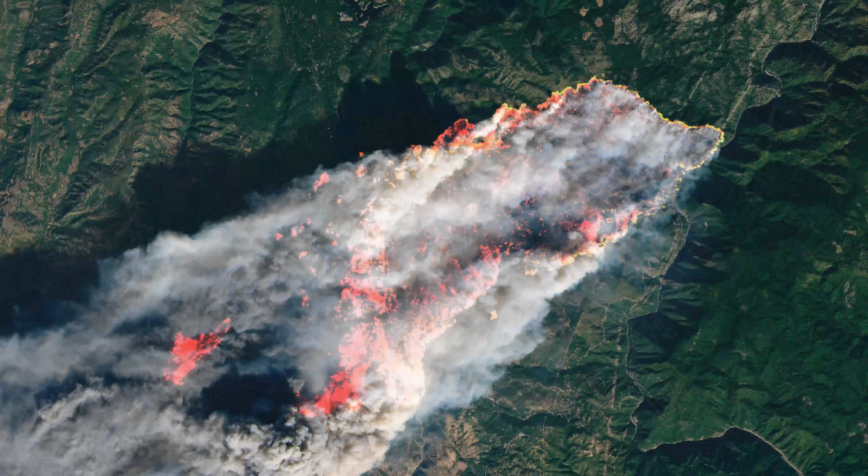As the meeting point between natural and built landscapes, the wildland-urban interface constitutes areas at highest risk for destructive and deadly fires, especially under the impacts of global climate change.

Wildfire events in the past decade have proven that further encroachment of development into dry and drought-ridden wildlands results in continuously unprecedented fire disasters. In order to mitigate this risk, we must rethink how these two entities meet, and limit the abrupt delineation between the arbitrary jurisdiction of natural land and urban land.

Rather than allowing these territories to meet along a single edge, this proposal reconfigures the built environment in the areas surrounding Paradise, California to create a series of edited edge conditions. The master plan strategy inserts two intermediary zones between wild and urban, designated as wild adjusted and urban adjusted.

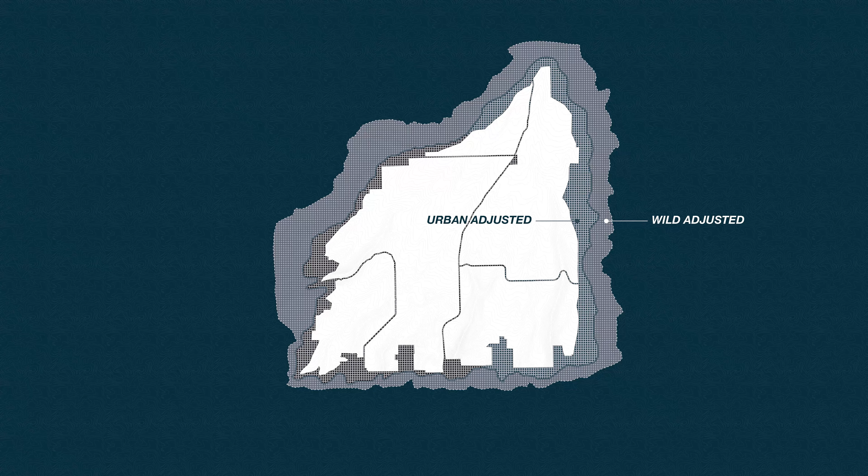The town plan, reconfigured around shared resources, public lands and year-round activated hubs, aims to foster community as a key ingredient to resilience. As a partial physical barrier, the thresholds will help to slow the spread of fire. But just as importantly, the master plan offers sites to engage the community during times of tranquility and non-emergency, so that recovery after disaster is less daunting.

The chosen project node on the eastern periphery of Paradise exemplifies this activity-driven approach, utilizing structures that highlight both UA and WA strategies respectively. The site of our main project is a section of the urban adjusted and wild adjusted zones on the eastern bluff of Paradise, looking out onto the Feather River Valley. Two structures occupy the site.

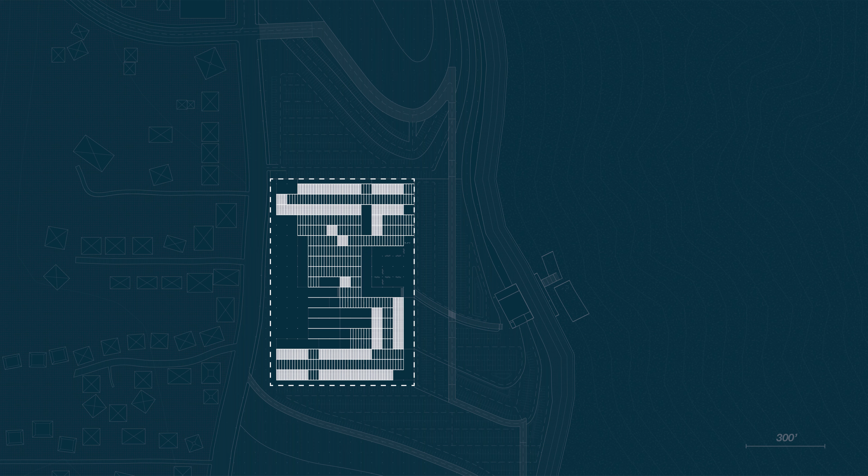The urban adjusted portion contains the farmers market, which transforms into a temporary emergency shelter for displaced members of the community in the aftermath of a disaster. The second structure is the wildfire management hub and community outlook, which spans the fire access road and tunnels into the wild adjusted area.

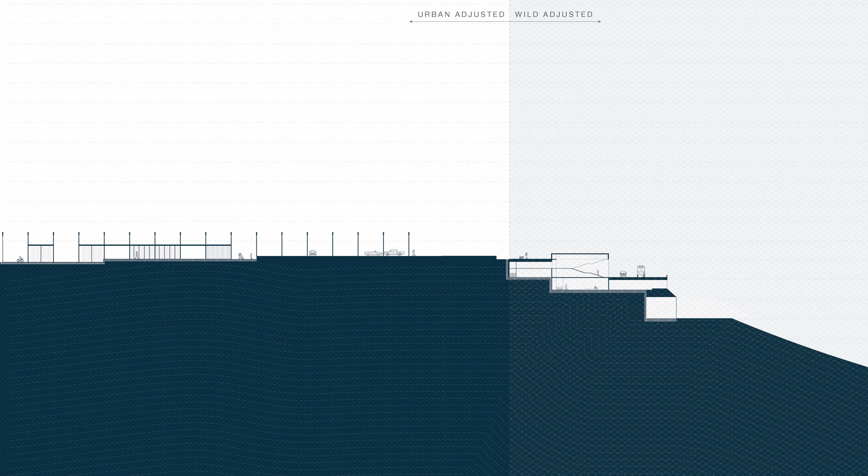The farmers market takes on a mat condition, sited lightly on the land and transitioning level by level with the slight slope on the top of the hill. Conversely, the wildfire management hub digs into the steep side of the hill, exposing dramatic views throughout the valley and beyond into the surrounding wildlands.

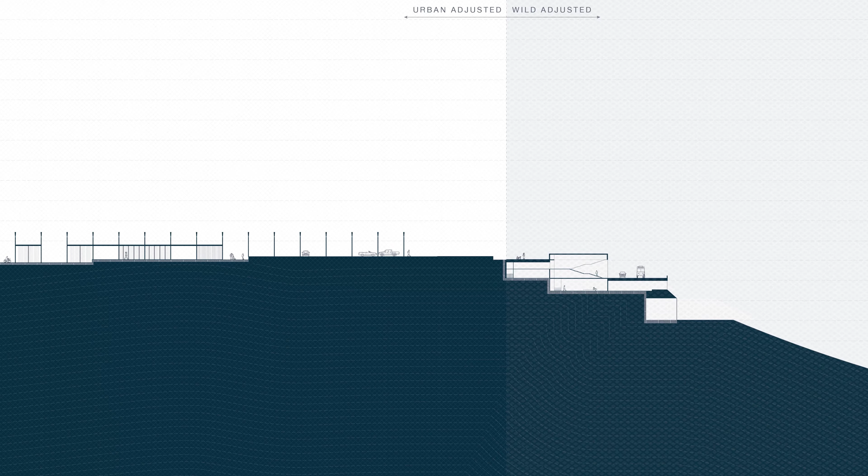Though the two structures operate independently and convey juxtaposing attitudes toward the landscape, the ecology of the site as a whole operates as a single system to facilitate both long-term and short-term resiliency.

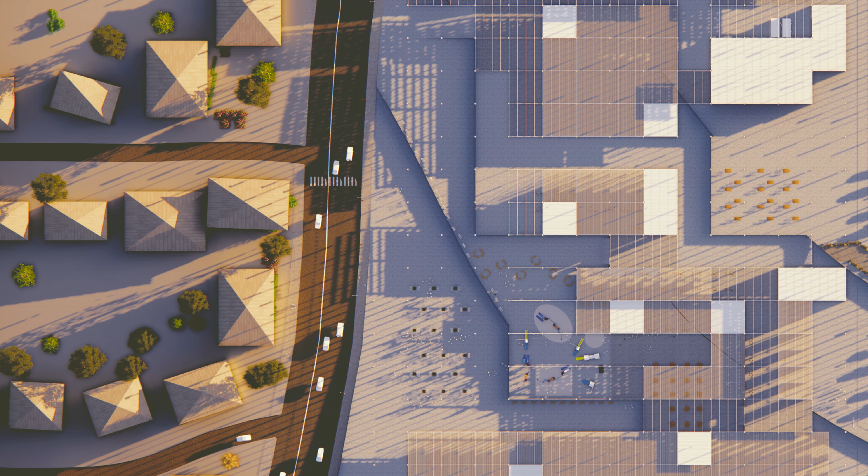Community members move throughout both sites, interacting with each other, while also collectively engaging with the surrounding landscape in different ways. As a result, the site allows visitors to understand use and development of the land within a framework of the greater ecology of the area as a whole, indelibly connected with the surrounding nature.

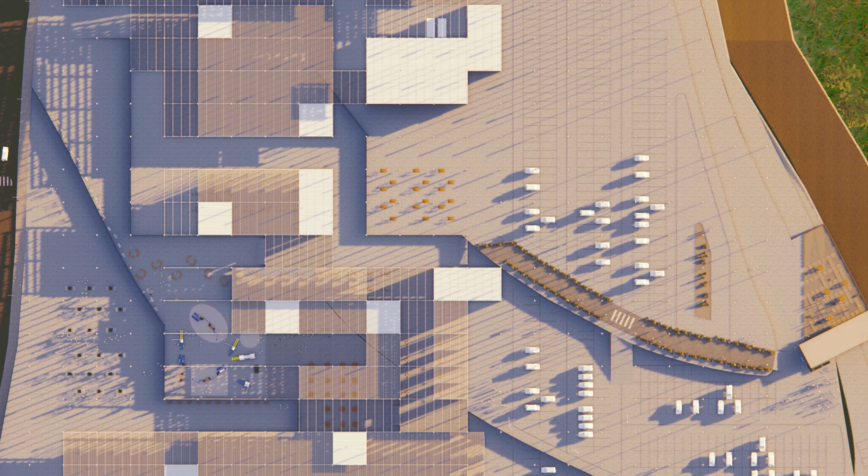Therefore, fire, a naturally existing component of the land, can be recognized as an ingrained aspect of daily life. The farmers market and management hub each contribute to this goal of the project through different means.

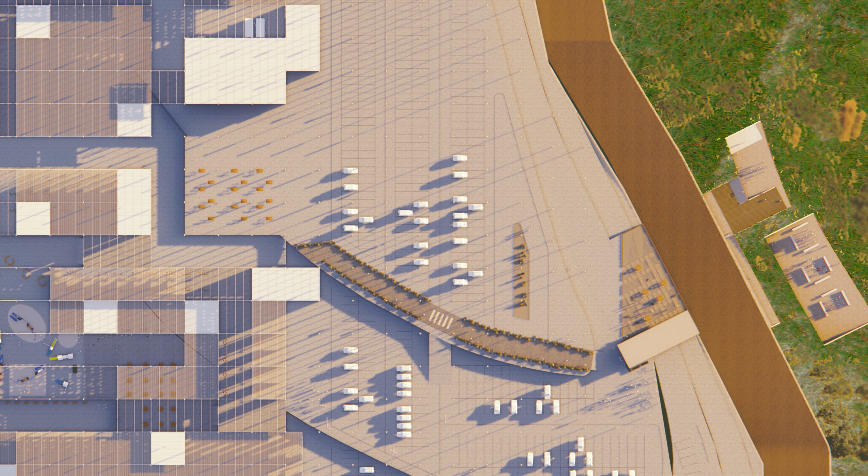The planar organization of the farmers market mediates between the strict 40-foot by 40-foot column grid of the windfield and the slight slope of the landscape. Each floor plate of the structure descends in 5-foot increments, allowing for a high level of visibility across the market.

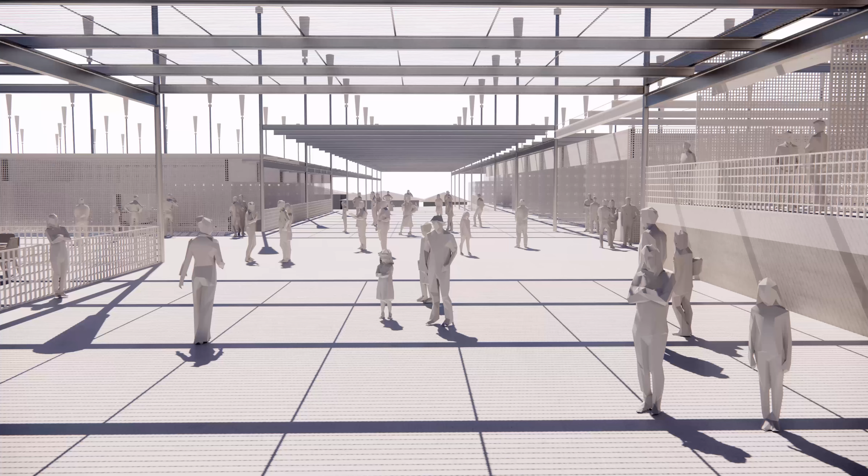The programmed spaces of the site include an information center, administrative office, sit-down restaurant, security office, eating and seating areas, children's area equipped with solar energy absorbing play structures, and market stalls.

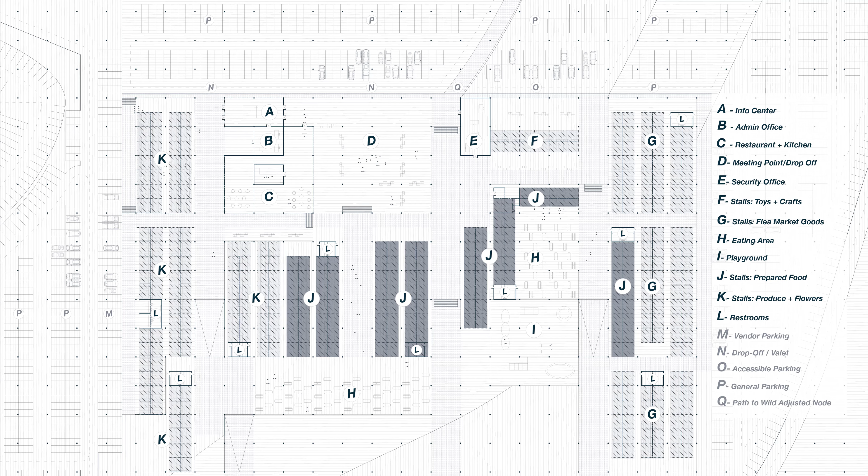The stalls are categorized as produce stalls, prepared food stalls, and flea market stalls. Each of these stall types has slight differences in layout, but all conform to the 20-foot by 20-foot footprint dictated by the subdivision of the column grid.

As a transitory site, the market operates through continuous movement. Vendors, customers, goods, architectural components and wind flow all constantly circulate through the space. The orientation of the project emphasizes this aspect, as main walkways cut through the market, maximizing east-west directionality.

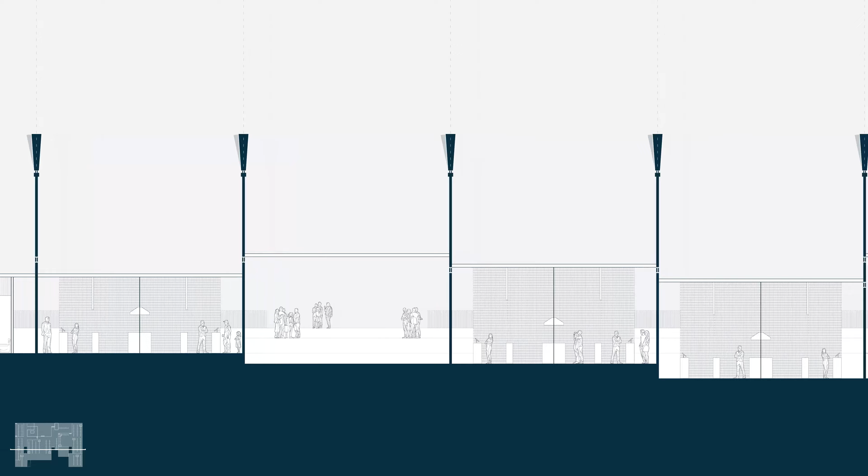The turbines operate via oscillation of a carbon fiber shell. The resulting kinetic energy is absorbed and converted without transmitting to the structure or column below.

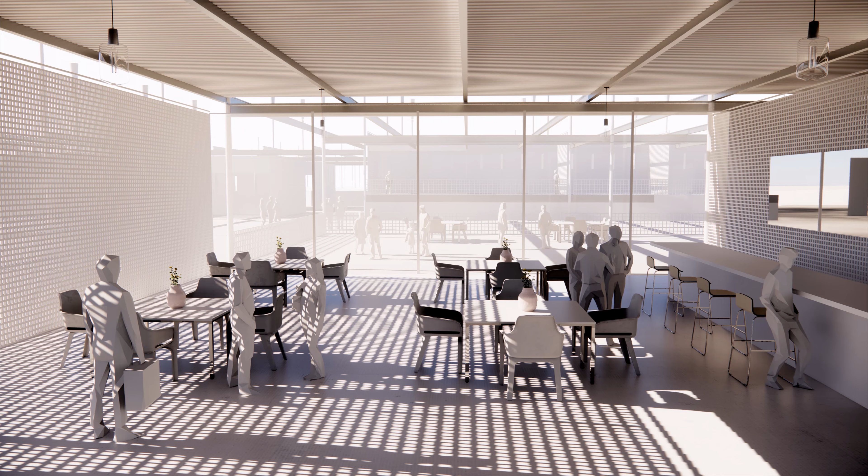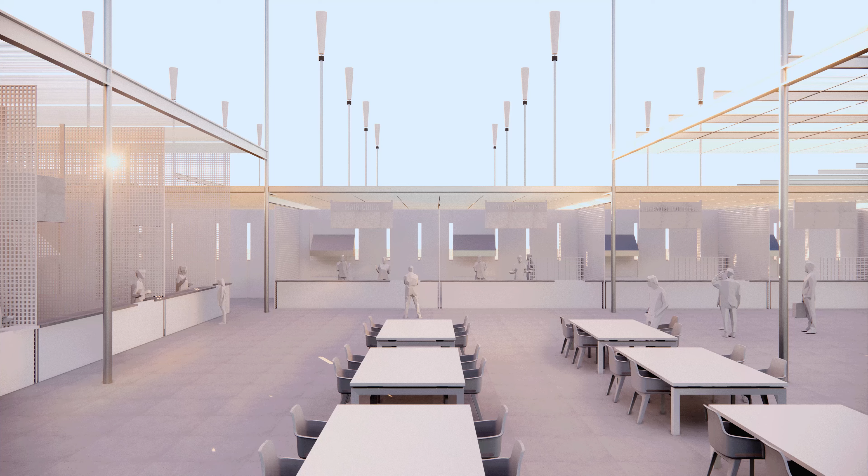The community of Paradise uses the space as a recurrent site of socializing, exchange, and play. This initiates the market as an important hub in the civic life of the town. With this relationship established, the market is primed to serve as a site of community resilience in the event of a disaster. Supplies distribution, communal services, and temporary shelter take over the spaces in the aftermath of a major emergency event, wildfire or otherwise. And the flexibility of the architectural system facilitates this transition.

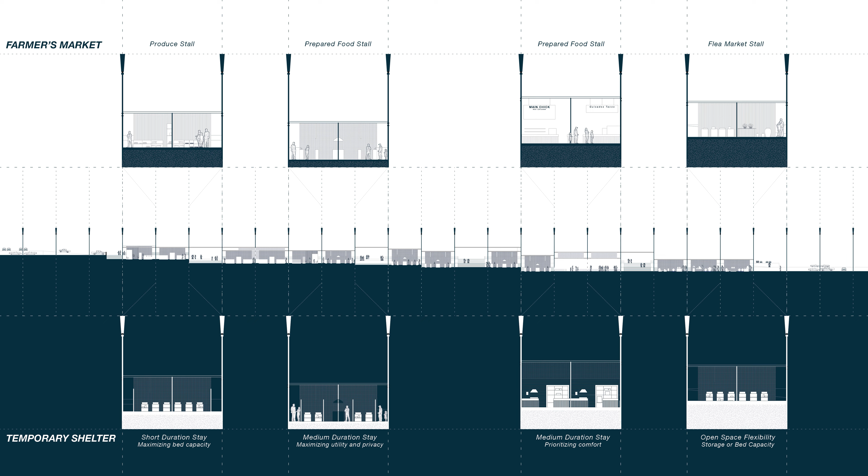The different stall types align with different needs of accommodation for varying lengths of time, depending on the magnitude of the event. The open, highly flexible produce and flea market stalls can be maximized with beds and storage for short duration stays, while the layout of the prepared food stalls are equipped with semi-private sleeping quarters and micro-kitchens for longer stays.

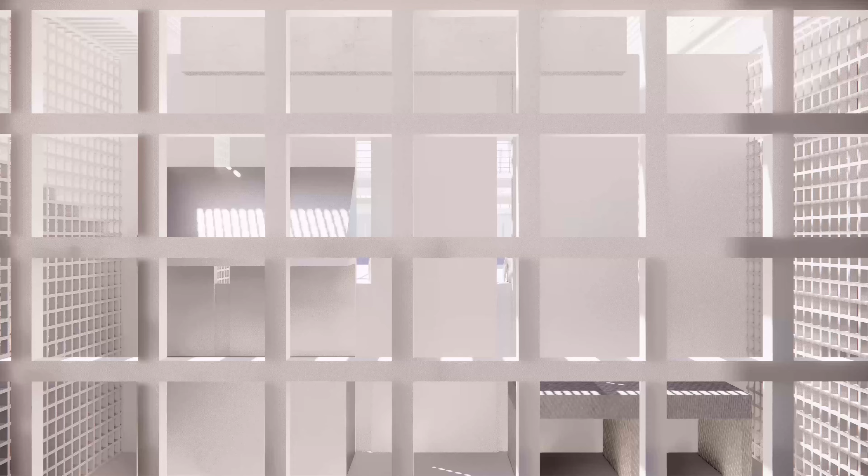The intention of the farmers' market is to demonstrate flexibility, not as a trope often associated with resilience, but as a community-specific strategy in both program and design. The site combines aspects of adaptability in both urban-scale design and small-scale architectural detailing. In this way, the project facilitates a broader understanding of how human activity and natural ecologies can support and benefit each other.

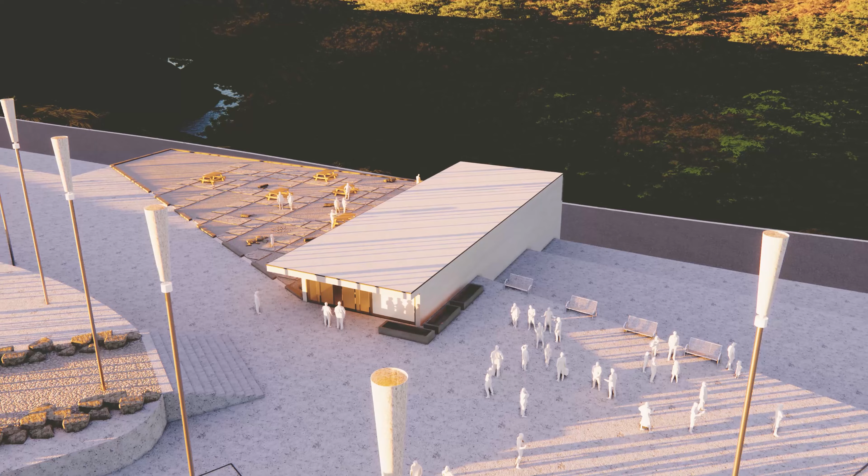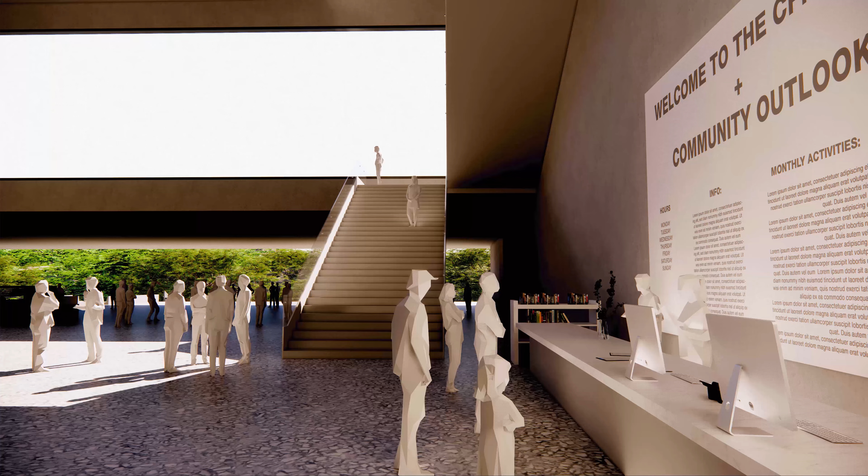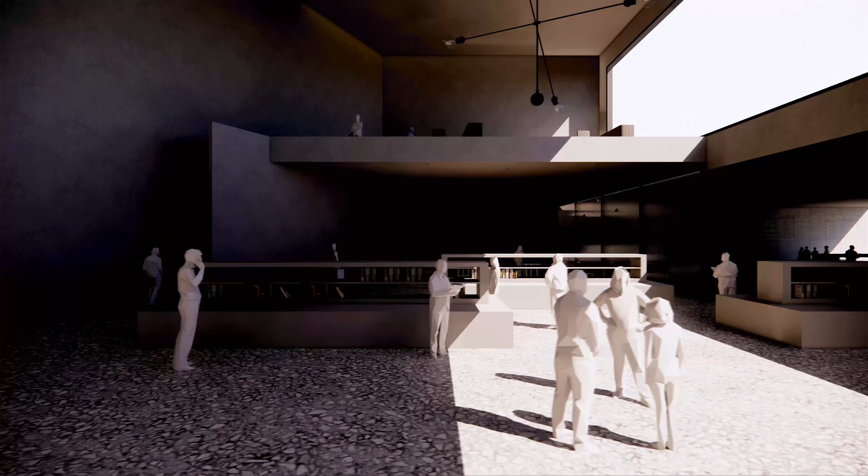Moving further out from the farmers' market following a pedestrian path across the site, visitors to the Wildfire Management Hub and Community Outlook are greeted with a minimal entry marking the edge of the wild adjusted zone. From the top level, visitors can descend into the building or choose to remain on the rooftop terrace to enjoy views of the valley. The first interior level opens into the lobby space and information center, with adjoining open offices for fire management officials. The lofted level, opposite the main staircase, meets the surface of the fire access road, allowing for easily available storage of firefighting equipment and vehicles.

The sunken reading area aims to facilitate casual exchange between community members and officers of the CFMC, PBA, Paradise Fire Department and CAL FIRE, offering freely available information on fire safety, permitting for prescribed burning, and volunteer opportunities.

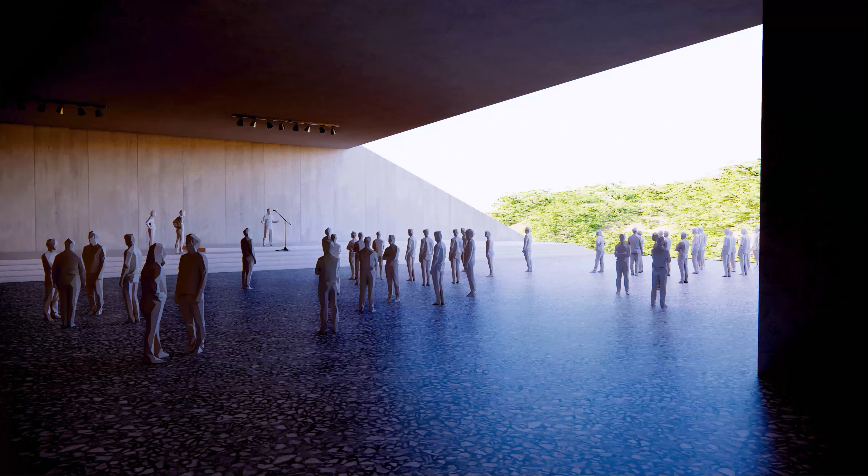Descending further into the wild adjusted zone, the building opens out onto the topography of the hillside, confronting visitors with a physical experience of traversing the landscape. At this level, open community gathering space offers flexibility in program and function, from large-scale information sessions to small group trainings. The orientation of the building allows for unobstructed views of the surrounding wildlands, and sets the stage for community members to witness changes in the landscape over time.

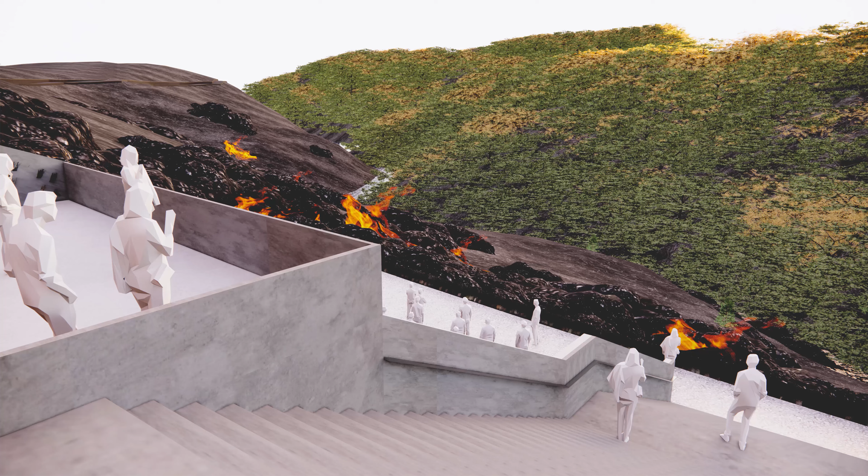The structure itself acts as a threshold, functioning as a main hub for a larger network of fire management officials and administrators by providing access into the wildlands. The hub also offers the broader community of Paradise a space to appreciate and learn from their natural surroundings, allowing them to reflect on their own existence and daily activities within the greater context of the larger ecosystem.

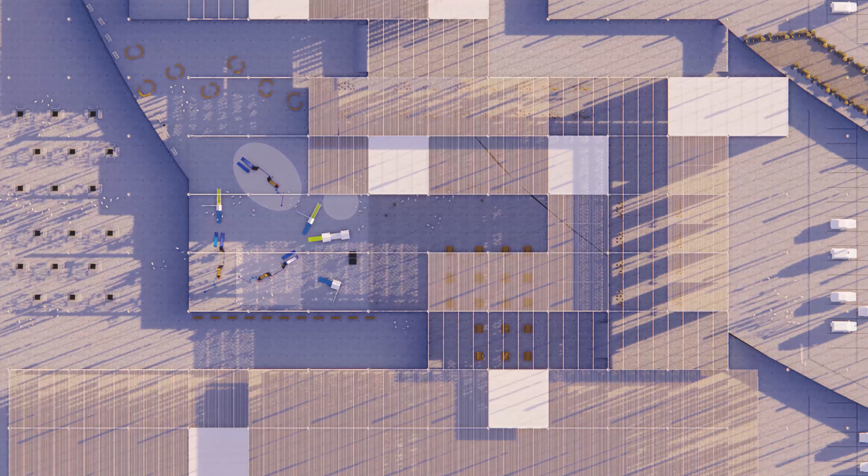Both the farmers' market and wildfire management hub strive to integrate resilience into the fabric of the community of Paradise. While major components of each project are designed to respond directly to fire disasters and emergencies, the overarching approach at the site is to shift the mindset of community members. The project strives to connect residents of Paradise with each other and with the landscape, at different scales and across different intervals of time. In this way, the project at the urban scale more accurately reflects how human activity and natural ecosystems are inseparably intertwined.